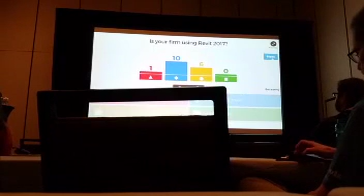So here we go to Kahoot. I'm going to go back to that poll and ask you the next question. I want to know who cares about architectural features here and why. Hopefully you let that open. You can just check the box. If you haven't used this before, it's like a teaching tool. It's totally free, so it's really easy to use. It takes you seconds to build a poll.

Okay, so we've got some folks that are focused around the architectural stuff, and then we've got maybe some engineers or general BIM management folks that put them in there as being just about as important as everything else. That's cool. Kind of expected.

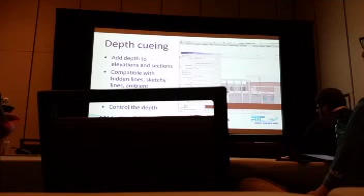One of the showy features that's been requested for a long time is depth cueing. In fact, I knew a very large architecture firm, and this might sound silly to those of you that implemented Revit a long time ago, but one of their entire divisions would not implement Revit for a number of years because it didn't have depth cueing, because their elevations didn't automatically indicate how far away you were. So that is there now. Has anybody tried this out? Okay, it's a pretty simple feature.

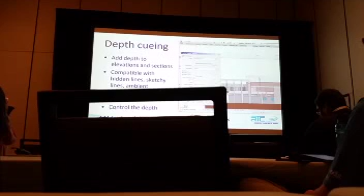Scott and I were in a discussion where it was like, hey, do we roll this out right now, or do we package it later? I'm like, are you kidding me? Roll this thing out right now. It's 5 years overdue. So this allows you to very quickly, in the graphics display options, set it up so that you're able to fade out what's in the background. It does rasterize that output, of course. That's just the way it works, so keep that in mind.

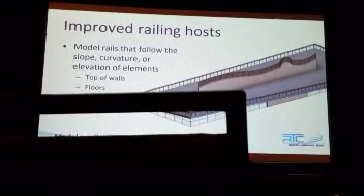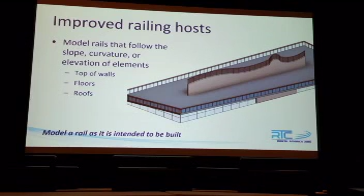If you've been to railings and fences types of presentations before by people like Marcelo, you know that there were some limitations, not all of which have been resolved, with using complex surfaces and things like railings, but in 2017, we are able to at least follow certain types of edges, which does add a lot of flexibility.

If you haven't been using FormIt, please think about it. I could go into an hour. There was a workshop yesterday that Tom Vollaro ran. I could talk to you for an hour about why this is a better workflow to go straight into Revit from a conceptual design perspective.

You can run Dynamo scripts inside of FormIt. You can perform Insight 360-based energy analysis, which we'll talk about in a second, directly from FormIt. But when you save a FormIt model, it saves to A360 in the cloud, it's automatically converting that to a Revit native mass, so you're continuing to work instead of throwing it away. So it's a really cool thing.

The FormIt 360 converter is an add-in that sits inside of Revit that we released in the second half of last year for this version of software. We kind of updated it as we went along. And it allows us to either bring in SketchUp content into FormIt, which then of course means going into Revit through the process I just talked about, or you can bring in your Revit component families, ones that are not hosted at this time, but this will only get stronger over time.

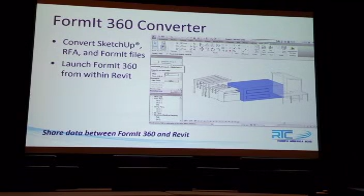Bring those component families in, it kind of gives you the cartoon version in FormIt. Those automatically map back to the real families in your library when this thing converts back to Revit. So what we're doing is getting one step closer to the real process, which is, I have somebody who's probably not a Revit user doing some conceptual design on the front end. They are handing that over the wall, so to speak, to the people who actually produce this, namely some of you guys.

At some point, that person's going to want to influence the design again, that senior designer or whatever. We want to be able to basically flow the model back and forth, right? Whatever the Revit model is. And so this is the first step to do that.

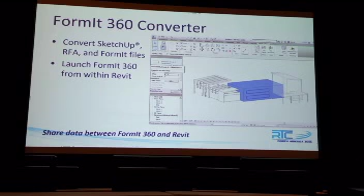Insight 360 is a repackaging of all of our energy analysis tools in a new way that makes it a lot more seamless. Anthony talked a little bit about even trying to run back and forth. In other words, not pushing out a concept for Insight 360 to analyze, but for, in fact, Insight 360 analysis to be driving the design from the beginning.

But what you have to understand about this is, just to kind of plug some of the work that's happened here, is that a couple of years ago, Autodesk rewrote EnergyPlus for the federal government, 400,000 lines of code that we rewrote into a language that people understand because it was in Fortran and nobody speaks that anymore. And so we did that, and then a couple of years after that, we put it in the cloud, so it's much faster. And so we're developing that for the DOE.

We also have written about 17 releases of DOE-2 for the DOE, so we're actually doing all the development for energy analysis tools that are used today underneath the hood. And so our tools take advantage of that.

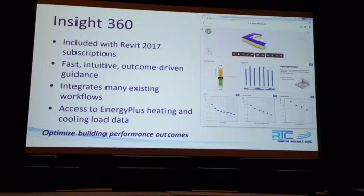So now when you're in Insight 360 and you're doing heating and cooling loads calculations out of Revit, you're pushing a button that's running in EnergyPlus Cloud, which is something we authored for the DOE, and you're getting that information very quickly. And then for some of our other whole building energy analysis, it's running on DOE-2. If you need more info on that, we've got lots more we can talk about.

Global parameters. I'm trying to think of when we first... A lot of this stuff to me has been out for a while. It's because of events we've attended in the past where we were kind of rolling this out to a test group of customers. But global parameters allow us to just basically map parameters across the project without respecting categories, right? So if you want to have cross-category parameters for the sake of just tying elements together that are otherwise unrelated, global parameters enable that. There's a lot more I could say about this.

Kind of a topic that needs examples, but if you guys have questions about global parameters, please talk to Scott or myself after the session. Scott, can you think of any good examples you've seen of people using this right now?

The one that we're displaying at our booth, so after this you can obviously go over and talk to us at the Autodesk booth. There's one that we set up global parameters that when you actually change one, stretch a wall, the room size is set by square footage.

So the other walls adjust, but not only that, the furniture layout, the array of chairs in this room actually automatically adjusts too. So you imagine laying out something like an auditorium like this. As you move the wall in, maybe it takes these tables and then rearranges them into a different array automatically. That's all done with global parameters.

Yeah, so you're building relationships across the project between things that would otherwise not have that relationship. And that's something that shared parameters doesn't really do. Shared parameters might allow us to think about some things in the schedule.

Does that work across linked models? Linked files? It's a great question. I don't know. Let's take that over to the booth and we can run it by Heather or one of the other people. Let's try it. Find out.

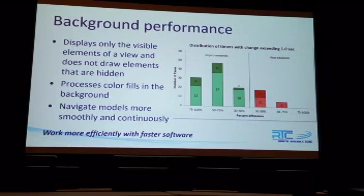You can see just by the chart, I won't get into detail, the performance improvements are significant. To be able to spin around 1 gig models and have it smooth is powerful stuff. Yeah, and I talk to customers about that. I say upgrade to 2017, there's a bunch of great features this year, but speed alone is totally worth the upgrade.

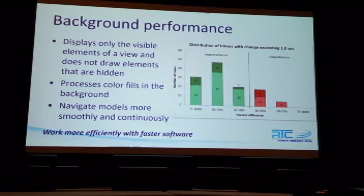Aaron Maller, people know Parallax, but I know Aaron from a past life. He tells it like it is. His first tweet when he saw this was, I need this like yesterday. Go see Aaron's setup. He's got computers running a huge model from his previous employer, Becker. He's got every single thing turned on, down to modeled outlets, full-blown outlets, and he turned the whole thing on and spins around like it's four walls and a roof. So pretty sweet.

Autodesk has a relationship with Mental Images and Mental Ray, and that relationship is maintained in 3ds Max. We have Mental Ray as a renderer in Max, but we've been working for a few years on a ray tracer that's faster and more physically accurate in lighting than Mental Ray. That's become the standard backbone engine in all Autodesk products as of this year. So we had a split persona where you could run Mental Ray or a ray tracer in past years, and now it's just becoming the default engine.

It's fast and more physically accurate, but why is that important? Because we're all rendering in the cloud now. Maybe you are, maybe you aren't. I feel like people should be. But really, it's unifying our engines across all our platforms so we don't have to respond to an outside third-party renderer, and it performs better. It's more similar in function to our cloud-based rendering tools, which are highly optimized already. I don't think it's that way yet, but our cloud renderer will be this ray tracing engine at some point.

So you render in Revit or you render in the cloud, they will be identical. I know they're not currently yet today, but that's the plan. Yeah, with the challenge being that we've largely addressed, but still continue to work on, that materials across every single product become the same thing, right? As you know, if you had to roll out Revit each year and then review your libraries, that's been a significant thing because we've had to go through several steps to get there.

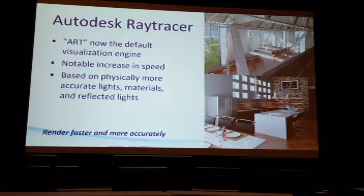We had really robust materials from a graphics perspective and things like Max, and from a lighting perspective, but we didn't have some of the data that's carried in Revit. Revit carries physical properties that then communicate to things like structural analysis tools that are not relevant or understood by something like Max in the past. And so being able to pull all of that together and have one engine that understands and unifies them all is powerful. This is big news.

It's just we've been working on it forever. So the #1 requested feature on AUGI's list for like 7 years is a text editor. And we had a gunslinger type of event, we call it Inside the Factory Live now, where we were saying, okay, so we think we're ready. We've basically taken WordPad and dropped it into Revit. And so that's effectively what it's doing.

It's like, here's the thing, it's going to break your text because it measures text differently. So if you upgrade a project, expect kind of wonky stuff to happen. Is that okay? And the answer was completely yes, unanimous. Yes, please get this done. So it's a one-time messing with your old projects as you update it. But it does measure text the way AutoCAD measures text now, so people get what they expect to get on a sheet. It also has the functionalities, as I said, with WordPad.

It doesn't mean it's done, but it means we've migrated the engine. This was a big deal, not just because it's taken so long, because it was just terrible every time we tried to do it before, but it's one of the last core things of Revit that we had not rewritten. There were some things that were real easy to change when Autodesk acquired Revit, and then there are some things inside the core that are next to impossible to change. It took a lot of years to rip that out and have it not break everything you guys have done.

In the new editors, there's a really good section in the Help File too that explains exactly how text is measured. So if that's something that is concerning to you, it has to do with the serifs and everything else that go with fonts, and there's a great help section that describes exactly how to measure. Yes, because if not you, the person who does red lines or whatever in the office will inevitably have questions.

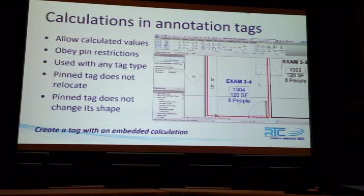Speaking of tags, calculations in tags - I would have loved this when I was in practice a while back. But finally, we can create or add calculated values into tags. Just a little bit smarter each year.

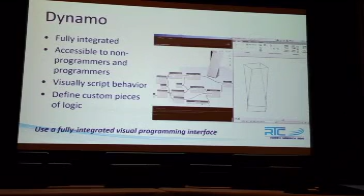Dynamo was available as a plugin for Revit over the years, and now it just ships with it out of the box. If you haven't learned about Dynamo, you clearly weren't here last year because half the sessions had Dynamo in it. Dynamo is a significant addition to the Revit experience in the sense that without having to know how to write code in the API, you can still access everything that's in the API. Dynamo had a big event in the last couple of months.

Does anybody know what the big event was in the Dynamo world? 1.0 - an actual real release, not a point release. Legit something release. Yeah, the 1.0 release of Dynamo - 74 releases in, we finally went 1.0. I'd love to talk about this more, but we've got to move on. Huge number of programs that it runs on now, inside and outside of Autodesk.

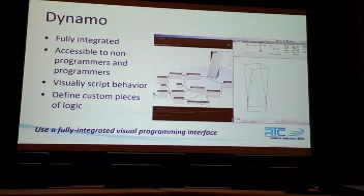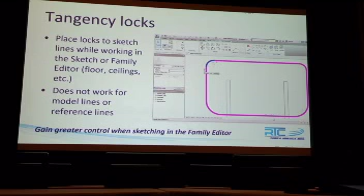Okay, tangency locks. This is just for when you're sketching - you can lock the sketching line so it doesn't do all kinds of bizarre stuff as you move around. So it's just a little bit of helpfulness when you're sketching.

Okay, so those are kind of the general features. Let's move into structural. To do that, let's wake up your phones again - I want to find out what you care about or don't, so I can decide on a pace for structural. How are we going?

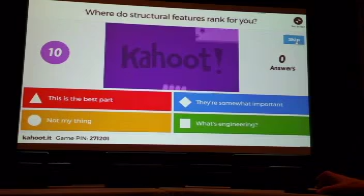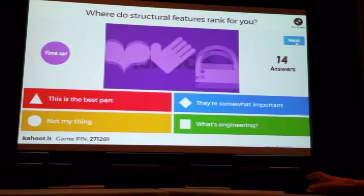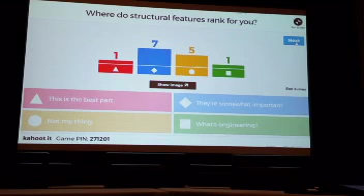I was going to try to mix in a live demo, but it's a little tedious. All right, so some people care, some people don't. We have one structural engineer in the room. All right, thank you - I'm a civil structural engineer. I feel you. Remember what our keynote said though? Structural engineers save people every time the wind blows.

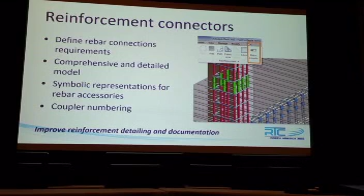Yeah, so okay, reinforcement connectors - I'm going to go fast, so that's basically what you guys told me. Somewhat important: when we cut bars, we now can drop in couplers as accessories, essentially connections.

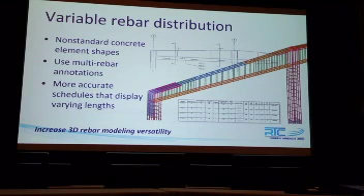Variable rebar distribution: now when I have sloping, as you see there, a sloping member or member that's not a uniform size, the stirrups and so on find their way. It doesn't work for freeform stuff yet, but it does work for these more common types of sections.

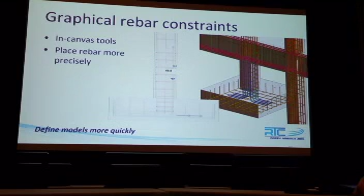So we used to have this dialog box that popped up - I wouldn't want to show it to you, it's so ugly - and showed you all of your offsets in terms of rebar constraints, all your different cover settings and so on. Now it's in-canvas, more like a sketch thing that you can grab and drag, with floating information in the canvas, which is just much better.

You can now bend fabric sheets. This is cool because you can basically sketch a profile and they follow that, so it's much more realistic.

I think it gets really interesting with the beginning of the migration of some tools from Advance Steel into Revit. We had to define a new category for connections in Revit that had no knowledge of this before. Even without the Advance Steel part, we had to define something called a generic connection, which can hold information that can then be shared.

So when you give the Revit model to a detailer, that detailer has information about what that connection is supposed to do, even if you're not modeling anything for them—at least they have the design parameters right there instead of in a separate report. It also has the ability to show a status for approval, so you could use that as a workflow between a structural engineer and a detailer: here's the connection we want, the type it is, and somebody approves it or doesn't.

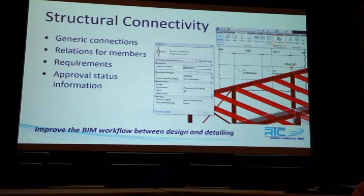Once you have connections enabled as a thing in Revit, you can migrate a whole bunch of the connection templates out of Advance Steel directly into the Revit environment. So you can install steel connections for Revit—it's a module you can install off the Exchange—and then you're able to define connections using a wizard.

It's very good stuff. Advance Steel competes against SDS2, the best in the business in terms of steel detailing, and getting some of that functionality in Revit means an engineer doesn't have to just have the generic set of typical details—they can actually embed real information in there.

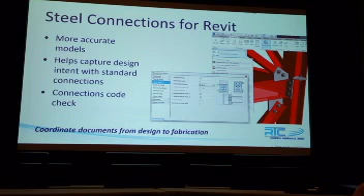And very quickly—the key is that you can do 3D connections very, very fast. It does do code checks in terms of shear, pull out, the normal stuff. So it's looking at the connection geometry and saying, okay, that plate can handle that kind of force.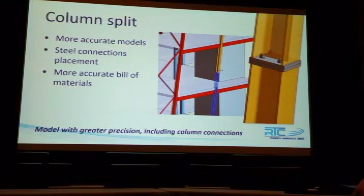There's a column split tool, kind of like the rebar connectors. We can split a column vertically and then add a connection. So that's just more realistic than what we had before.

Improved steel content—I don't need to go into this much other than to say we keep bolstering these tools. A few years ago we had Revit, Robot, and Advanced Steel all with different libraries. Revit had some things like Vulcraft joist girders that weren't inside of Robot, for example, and Advanced Steel had a ton of stuff that wasn't in the other two programs.

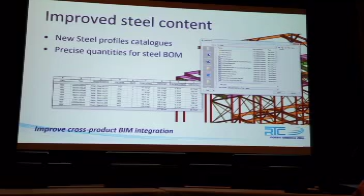So a couple of years ago, we synced up Revit and Robot. It wasn't sexy, it was all behind the scenes, but every structural family in Revit was rebuilt two years ago—on the version some of you might be running—to include all the analytical properties needed, as well as the snap points used by detailing software. Then last year, the 2015 or 2016 release, we brought all this stuff out of the Advanced Steel catalog into Revit and Robot, so that when you go back and forth between these softwares, there's no mapping issues.

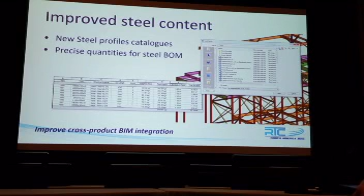Because if you don't know this, Revit has bidirectional links with Robot—it's a live design workflow, you don't have to export or import anything. Same thing, Revit can synchronize bidirectionally with Advanced Steel. And now, this year, Advanced Steel can synchronize with Robot too, so there's a three-way relationship there. Very strong tools, actually.

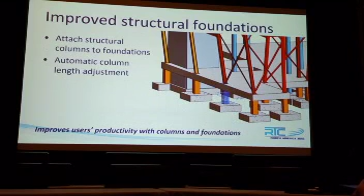Structural foundations have just improved a little bit—you can attach columns to foundations. It's basic stuff, but it's stuff that needs to be in Revit. Should have been there before, I think.

Okay, MEP next—you can kind of see where it's going.

Yes, sir—did they pull the timber libraries over from Robot? I'm not sure, actually. I don't know that. I know that, until... so I don't want to get off topic too much, but Robot has—and we want to talk about Robot a little bit, so let's table that.

Okay, all right, so we got some MEP fans in the room. That's good. All right, so we'll talk a little bit about this.

Now, as Desi was saying, I'm an architect and I'm an engineer, but I'm a civil structural engineer, so MEP is not my strongest suit. But what you should know is, for those of you familiar with the MEP fabrication portfolio, we've been migrating some of that functionality to Revit over the last couple of years, and certainly building a stronger connection between our Revit MEP tool set and our MEP fabrication tool set.

One evidence of that in 2017 is that I can take Revit stuff and, with a push of a button, for standard defined components, get the MEP stuff out of it automatically, the fabricable stuff automatically. This was demonstrated at a preview level by Map Software several years ago, right before we acquired them. So we're now starting to see that become baked into Revit, which is cool. It's taking a little while to do.

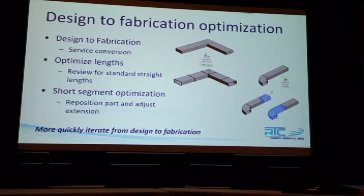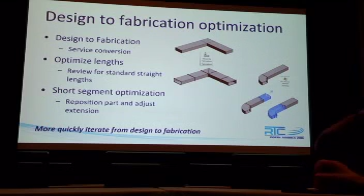There's a lot of intelligence about the standard sections that we buy. It's cool that we're getting smarter about understanding what can actually be bought and shipped versus what's just design intent. So I'm seeing either automatic standard section lengths populate, or information about segments that would never be done this way because that's too short - this just doesn't make sense. There's some intelligence in the program now about what's actually fabricable or what would actually be ordered, making its way into Revit. This kind of thing is standard in fabrication software and has not been present in Revit in the past.

So I've got a question - does it actually create, I believe you get into it with spools and things of that nature now, or is it just putting in the more fabricated parts? It's more the latter, because the idea is still that you'll push the button and send it into our MEP fabrication software for the purposes of doing that. At least for now - what the writing is on the wall, I'm not sure.

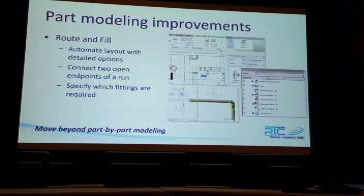So just a number of improvements about routing and filling - connecting open endpoints, specifying which fittings should be required. I would just define this as removing limitations, that's probably the way to put it. There have been enough limitations when the MEP fab stuff started to appear in Revit over the last couple of years - it was really only for very basic things, and by making it more flexible, which is what this is really telling us, we're able to use it for more and more.

Things like a trim and extend command, which you just assume exists for everything, did not exist for MEP components - now it does. And then quick connect - you can just grab and stretch fittings together and things connect. It works, where it was broken in the past.

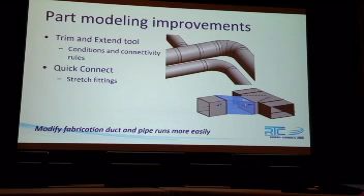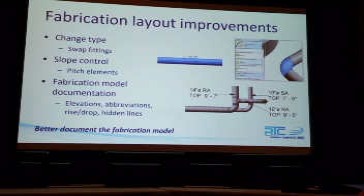More hangers, lots of options actually, additional options for hangers to make it more realistic this year.

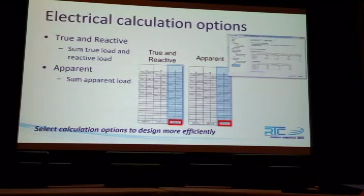We now can do a little bit more in terms of electrical calculations. So you're seeing just an example here, summing apparent load, as well as two different ways of using some of this. So you have options, control over the options for calculation.

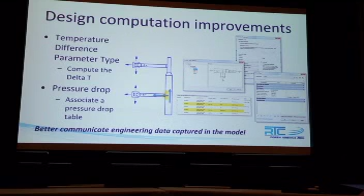We have additional parameters, so temperature difference parameter, pressure drop - just more of the background data, so not only for fabrication, but also for calculation. Yes, of course, mark values, pipe system volume. So yes, we can now compute pipe system volumes in the background, so it doesn't slow you down any.

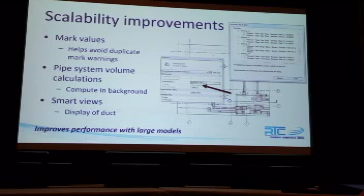And then I mentioned earlier some of the performance improvements, like the fact that it doesn't spend time calculating things you don't see. Well, that has a lot to do with ductwork - it doesn't draw a duct that you don't see. Also, if you zoom out and something is only like one line in terms of what you actually see on the screen, it draws it as one line, and as you zoom in, it will start to draw it all. When you have very large models - and it doesn't even take very large models, but complex models - as you start to zoom out and it's spaghetti, it's just drawing that as line work because that's all you're looking at anyway. So it's much, much faster with large MEP models.

Okay, it's a quick rundown of Revit, just highlights. I'm going to talk about a couple of other softwares, and only very briefly, so we can get to the rest of the message.

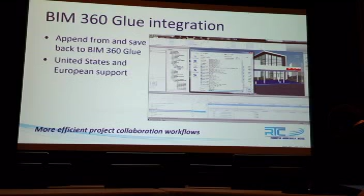Navisworks 2017 is pretty much the same software as 2016, but now there is better integration with BIM 360 Glue. We're putting a ton of investment into our BIM 360 portfolio, and what's cool is that we have all these models living in the cloud in one place. I can open it directly from Navisworks from Glue, do my editing, push that right back, and use Glue for all of the things it does, which enables everybody to be notified and track everything. Navisworks is now connected to that workflow where before it was disconnected.

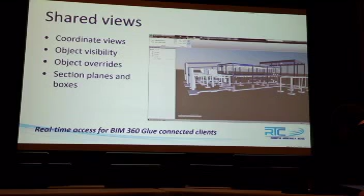So shared views means that if I have graphics overrides in Navisworks, like from clash viewpoints and so on, I can see that stuff in Glue and vice versa. I can share the views and those graphic overrides back and forth between whoever is using Navis, probably the construction coordinator or someone in the GC in charge of project coordination, so they're not disconnected from all the folks using Glue.

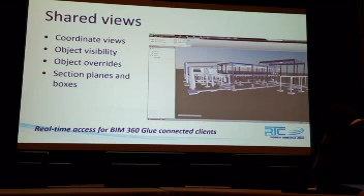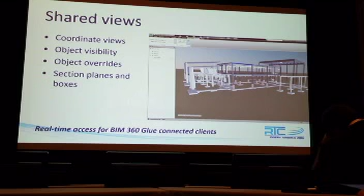So does that mean that if you create a viewpoint with shaded components and the actual highlighted clash, that gets retained if you publish it out? Yeah, that's right. So I can see that, and if I'm working in Glue, I can see it on my iPad out in the field, just as I would in Navis.

Inventor, I'm crossing over the suite, remember? So there are some tools that some of you might not know - what is Inventor? And others will be like, oh sweet, what's coming in Inventor? There's a whole lot in Inventor. I'm summarizing a few things that might be relevant to you guys, or might not.

We have some amazing commands like this 3D transform, the way we can define constraints are just so much more advanced in Inventor, I'll be honest. And a curve-on-face command - I mention this because if you ever need to make up something out of nothing, Inventor is a good tool to try.

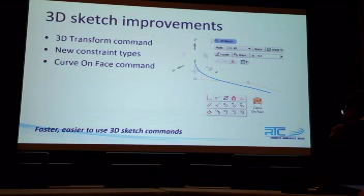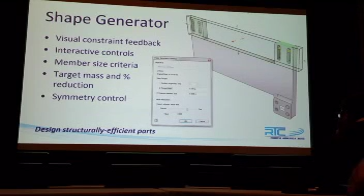Shape generator - some of these things I get jealous that they're not in Revit. This came online, I think, in the second half of Inventor, like the R2 release for 2016, and has been improved for 2017. You're seeing the ability to create parts that understand their structural purpose and are structurally efficient just through a dialogue. That's basically what Shape Generator does.

Mesh handling - you can bring meshes into Inventor and it understands them and allows you to work with them. That's significant. To bring a mesh in and display it is one thing; to bring it in and have it be an editable part that works with constraints and clash detection and everything else, that's pretty sweet.

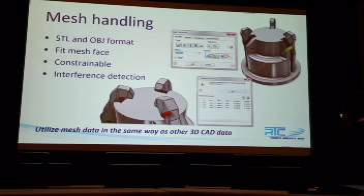Inventor has things like AnyCAD, where you can bring in anything - SolidWorks, whatever - into Inventor, and it just becomes a native Inventor object you can work with, which is really powerful. It's just really good, a way to make Inventor competitive in the marketplace.

The factory design suite layout - I mention this even though it's about AutoCAD, Navis and Vault, because it's a cool workflow story. This is a parallel thing that happens to a lot of us in the buildings industry. Like in my case, if I talk to an automotive or aerospace manufacturer, they're actually a very large owner interested in facility stuff, but also doing manufacturing and very concerned with efficiency and optimization. So there's a lot of crossover between the Inventor type of workflow and the Revit type of workflow, and where those touch points are is a challenge we're always addressing.

On the factory design side, if you're not aware, Inventor is powerful stuff - the ability to almost like a play set, plug and play different objects. They can be complex Inventor assemblies, but you throw them all together into a plan. People who don't speak Inventor but want to use this kit of parts can use AutoCAD to lay that stuff out. They can manage all the data, and Inventor is very tightly integrated with Vault, so it's a whole ecosystem of products unto itself.

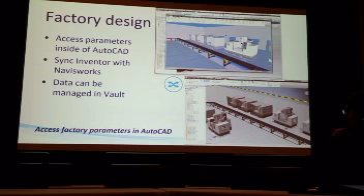3ds Max, huge product, obviously.